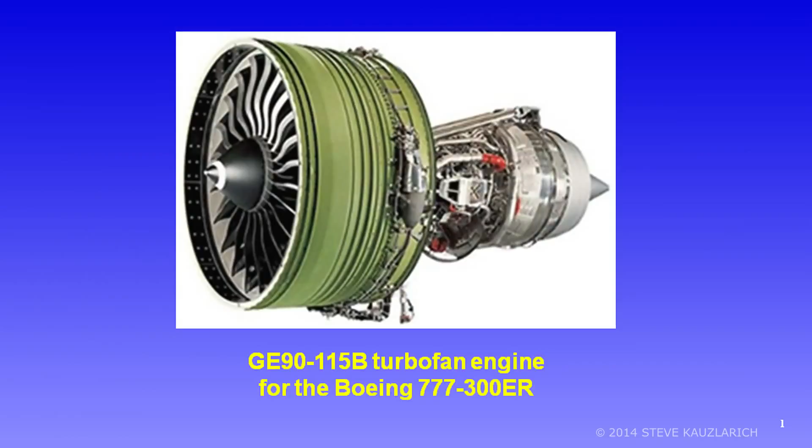So now take a look at that engine I put up there. I have a need for size and power, and this delivers. This is the most powerful aircraft engine ever put into service, built by GE. It has a Guinness World Book record as the most powerful aircraft engine with continuous thrust delivery on the order of 123,000 pounds. That's pretty good. And it's been derated for airline use to about 115,000 pounds, so it'll last longer on the wing.

Let's move on into the next slide. We're looking at the agenda tonight. We see a Westinghouse engine here, which they were not very successful. I'll talk more about Westinghouse's contribution later.

So I'll have some introductory remarks. We'll talk about what is jet propulsion, where did they come from. They came from Europe. What did the US do with this technology? They did a lot of good things with it.

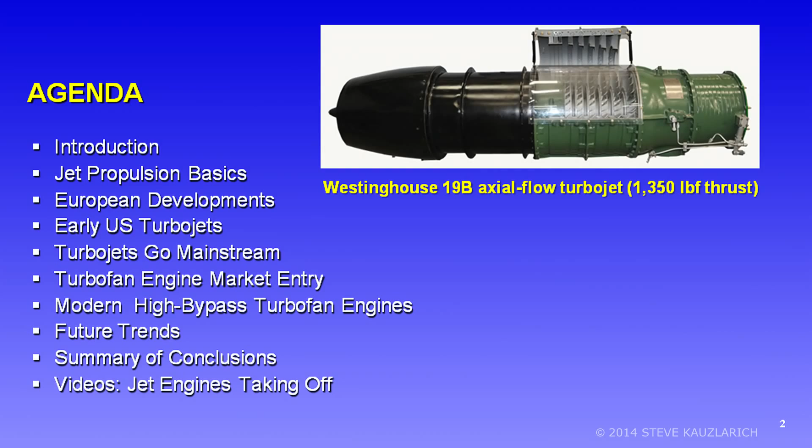We'll look at how the industry transitioned from turbojet to turbofan. In the Air Force inventory, there's almost no turbojets left. There are a few out there, like the T-38 Talon trainer from Northrop, one of the last ones operating with a turbojet. Then we're going to go into the airliner high bypass turbofans used in some military aircraft like the C-5. We'll look at some future trends.

So I'm going to take you from the origin to present and beyond. I'll talk about some of the future concepts being discussed now in jet propulsion, summary conclusions, and then I have two exciting short video clips of famous Air Force bombers taking off, one with water injection assist, the other with rocket assist. In those days, the turbojets were fairly anemic in power and they needed help.

All right, so I'm going to focus tonight on turbojet, turbofan. We'll set aside turboprop for another night. And now when we get to helicopter propulsion, they are turboshaft. They're not considered jet propulsion, with one notable exception.

The engineers at Westland, you got to like these guys. They hot rodded a Westland Lynx and added jet propulsion to it in a very clever way. They took the exhaust output. They have two turboshaft engines. They modified the exhaust, turned it into a convergent nozzle, cut the cross-sectional area by 40%. They picked up 600 pounds of thrust, jet thrust, from the exhaust, and set a world speed record, still not exceeded, for a conventional helicopter. In 1986, they hit 249 miles an hour.

Now notice that it doesn't have to be a gas turbine. Look at all the other variations of jet propulsion here. Some examples of jet propulsion were demonstrated really thousands of years ago, with Chinese experiments using tea kettles, steam kettles with pinwheels turning on top. That's a form of jet propulsion.

We have a ramjet shown down below, no moving parts, and it works. Now with the ramjet, you have to get it up to speed before you light it off, so that's a bit of a problem. They were used on the tips of Hiller helicopter blades, and they did experiments down at Palo Alto on that.

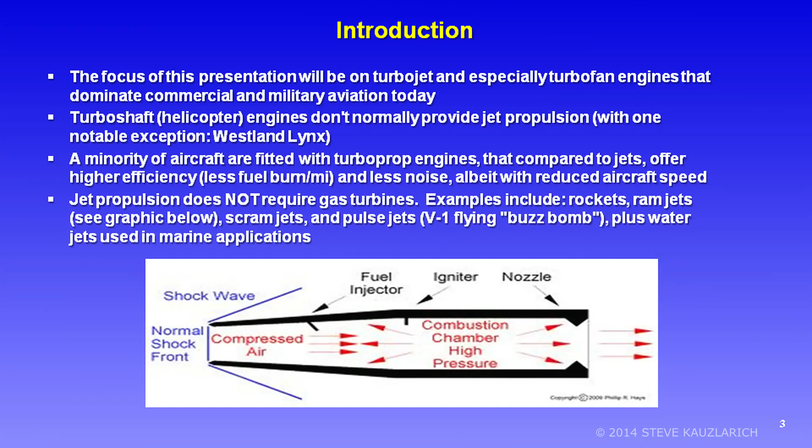What is jet propulsion? It's all about Newton's laws of motion, the second and third law: for every action, an equal and opposite reaction. Jet engines are also known as reaction motors. Every one of them has to produce a backwash force, ejecting gases at high velocity with acceleration and mass. The backwash force is immediately countered by a forward thrust force. It's automatic, you don't have to think about it. Kick stuff out the back, you'll be pushed forward. You're not sucked or pulled forward, it's just an automatic reaction to the backwash force, and it's neat how it works.

The fluid mediums could be all kinds of different gases. Here's a cutaway of a typical turbojet. You can see where the air comes in, is compressed, goes into the combustion chamber, and they light it off. So you're raising the pressure of the air, then raising the heat and combining it with fuel, and burning it. That goes into the hot turbine section where it spins those wheels. The pressure's let down, mechanical work is done, and you get high velocity exhaust out the nozzle. At the turbine inlet stage, they're now getting over 3,000°F, so they have to especially cool and insulate the blades to survive, feeding in bleed air from the compressor section to cool down the hot turbine stage.

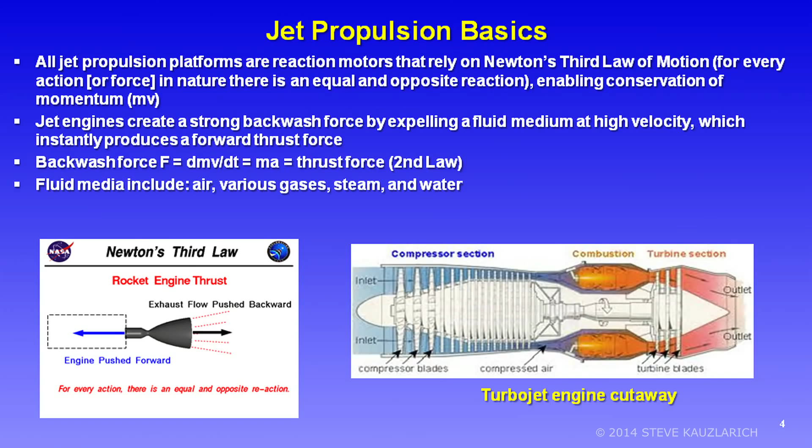This is more of a checklist for engineers. If you're designing this turbo machinery, these are the metrics you've got to meet. And if you're selling these engines to airlines or the military, you better come in pretty good on these attributes if you're going to beat a competitor to get the business. I won't take the time to define all of these metrics for you, but if you're interested later, I could talk to you further about what they mean.

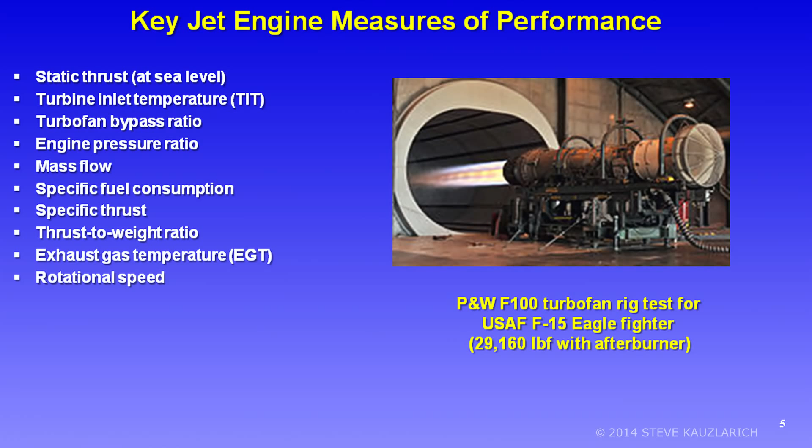I just love this picture of this F-15 Pratt & Whitney F100 engine. See the shock diamonds in the exhaust, right there? That's a sure sign of supersonic gas flow out the back end. Now, this happens to be a low bypass ratio turbofan. All the fighter engines today are low bypass turbofans. We'll get into turbofans more later, how that's different.

So how did piston aero engines lose the business? These are compelling reasons. Look at the performance gains and maintenance benefits of going to jet engines. You can create an airframe that's much faster, can fly a lot higher, and just do an altogether better job.

Now, here's one of my favorites, the J75 Turbojet, and you can mention a couple of the airframes it went into. I happen to have a model of a beloved F-106A Delta Dart Interceptor here that had just one J75. Believe it or not, this set a speed record that still stands today. They set the record in 1959 as the fastest single-engine jet on Earth, hitting Mach 2.31 at 40,000 feet altitude. That was almost 1,600 miles per hour. That's a great job by the Convair engineers in creating speed.

The purpose of this platform is to get up off the ground and intercept Soviet bombers. They had unguided nuclear-tipped Genie missiles to fire at the Soviet bombers. Hey, you just had to be in the general area, you don't need guidance. Just blow a nuke into the formation and you've got them. Never used in anger, just basically test fired once in the Nevada range.

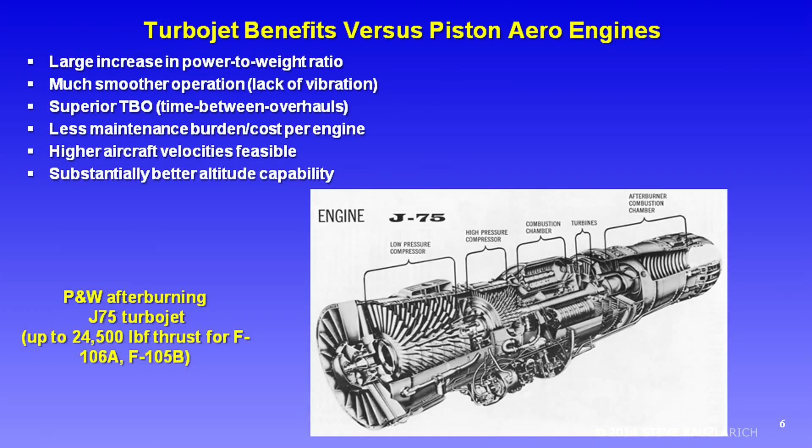Okay, talk about altitude, let me go back. The turbojets easily could exceed 100,000 feet in altitude on a zoom climb. That was awesome. I mean, piston bombers and so forth were good up to about 50,000 feet with lots of turbocharging. So you can more than double that with jet propulsion.

Now, they were a handful in the early days. They had terrible fuel efficiency, the materials were not that good, low thrust - they had to do tricks to get the thrust up, and we'll see examples of that coming up. Oh, they weren't so reliable in the early days either. TBOs are now much better - they were maybe low thousands of hours TBO in the early days, now they stay on the wing for over 20,000 hours. Compare that with aircraft piston engines.

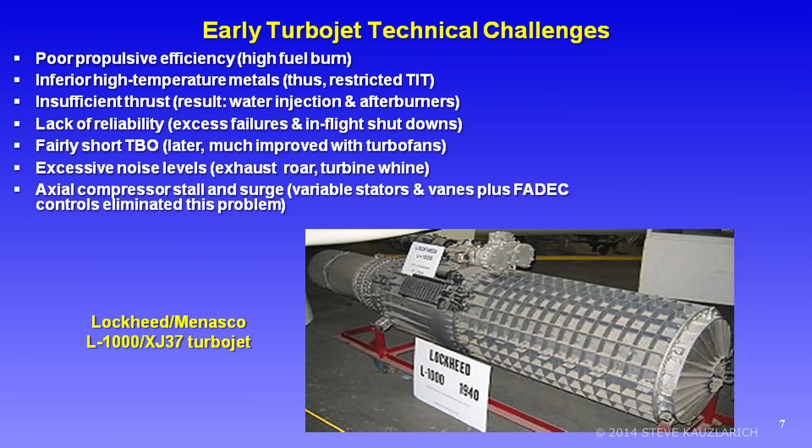Military World War II fighter engines, like the R-2800, had a TBO of about 300 hours because they were very overstressed. An R-2800 in a DC-6 airliner that was nursed and taken care of had a TBO of 2,500 hours. Now we've jumped up to over 20,000 hours with jets.

Talk about noise, this is one of the huge drawbacks of jet propulsion. What is the source of this noise? You've got front end and back end noise. In the back, you have high velocity, hot gas expelled that has violent mixing with cold air behind the aircraft, producing that low frequency rumble. Up front, you've got compressor whine, which is higher pitched and not quite as offensive.

Surge and stall, let's get into that. Do not head toward that surge line. If you get over to the surge line and to the left, the axial compressor loses its ability to compress, it's not compressing anymore. In fact, over there you get reverse flows, and you can have flames coming out of the front of the jet engine instead of the back. So engineers have to keep it in a safe operating point.

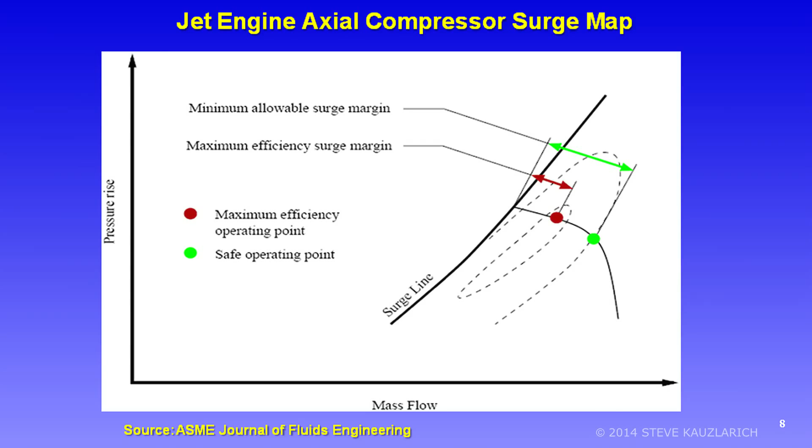A good way to stall an axial compressor is to have too high an angle of attack. Pilots are instructed that if this happens, you've got to reduce power, put the nose down, get the angle of attack down, and get the airspeed up. That will solve the problem.

So that's the story on stall. Stall is easier to handle than surge. Surge can be deadly, and by the way, these jet engines make noises—when they surge, you can get a big old bang coming out of there.

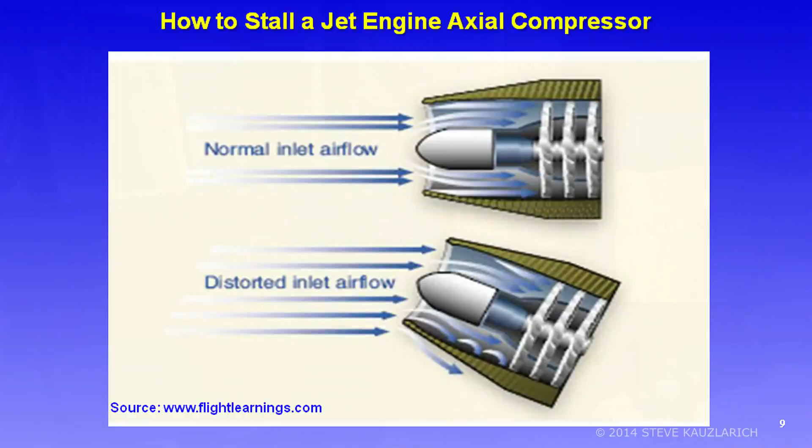Sir Frank Whittle was really ahead of the world in coming up with the concept of jet propulsion for aircraft. He got a patent in 1930 on this concept and had working engines on rig tests in 1937, but sadly he didn't get to fly his engines until 1941-42. The Germans beat him to it. Ohain, working for Heinkel, got his engine working in 1939, running on gasoline. They also tried hydrogen fuel and other fuels.

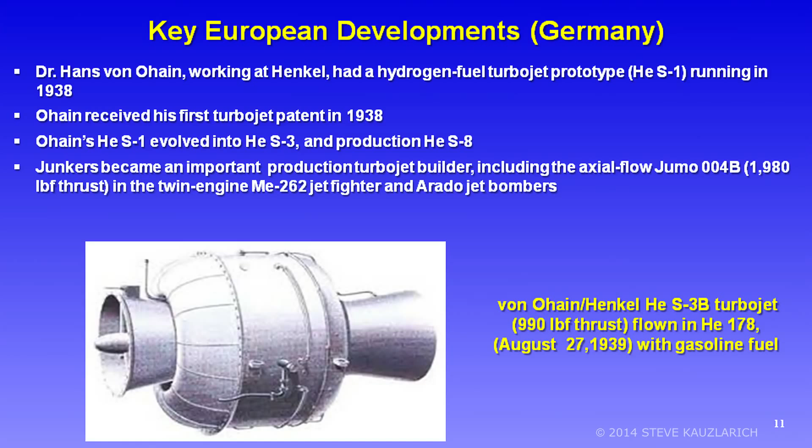Ohain became good friends with Whittle, and they both migrated to the United States and ran into each other often. I think they both went to work for the U.S. Air Force.

Here's Whittle's story. Sadly, his project was pulled from him by the UK government and given to Rover. What a mistake—Rover did not know what to do with this technology, so Rolls-Royce ended up taking it over from Rover to make these production engines. They had production jet fighters in World War II before we got our P-80 going. I have to tip my hat to the English. They also had the most advanced metallurgy in hot turbine sections, using nickel-based superalloys before anybody else on Earth. They had an edge there.

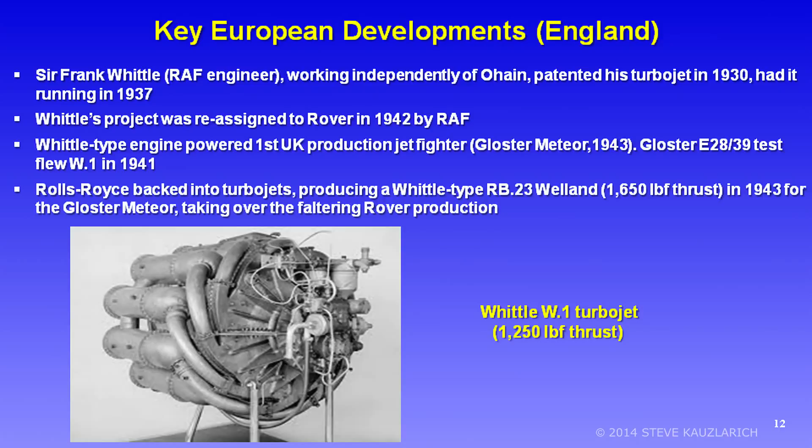Okay, how did we get in this business? General Hap Arnold, commander of the Army Air Force, went over to the UK and secured that license from Churchill and brought it to GE. Why GE? They had a lot of experience with turbo superchargers. In Lynn, Massachusetts, they were a logical proponent to run with this technology, and it didn't take them long to have their first Whittle engine running.

Pratt got in much later, really after World War II. They started with the Nene and then developed their own engines that turned out to be very good. Westinghouse was brought into the business by the U.S. Navy, which was already using them for marine propulsion, steam turbine propulsion. It turned out to be not a very good fit for Westinghouse—they struggled badly in this business and had to drop out.

I used to work for Menasco Manufacturing, so I was real interested in the R&D they were doing on jet engines in the late 40s. Just 3 engines were built.

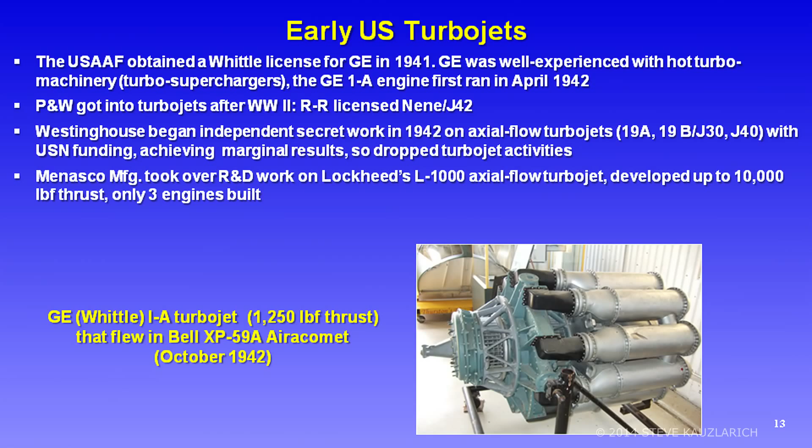Here's a Whittle engine that went into our first jet aircraft, which was totally underpowered and unsuitable for combat, so production was canceled for the Bell jet aircraft. It's amusing—when they transported this Bell around, they put a fake propeller on the front of the aircraft to try to fool people that it was not a jet.

Wow, now they're getting into commercial aviation. This was a big deal when we got into the jet age with airliners. It all started with Pan Am, with 707s, and these early models were equipped with Pratt & Whitney J57 twin-spool turbojet engines.

Great first efforts, but they found out they're still short of power and had to go to tricks like water injection, which gave about a 20% boost as long as you had water in the tank. They brought several hundred gallons typically under certain conditions, high takeoffs. And this had to be clean water—distilled or deionized—so you don't gum up the internals of the engine.

Sometimes they would mix it with methanol for antifreeze. That was a logistics nightmare doing this water injection, but hey, it allowed you to get by with inadequate thrust. And then we'll see a B-47 take off with rocket assist, which is very dramatic.

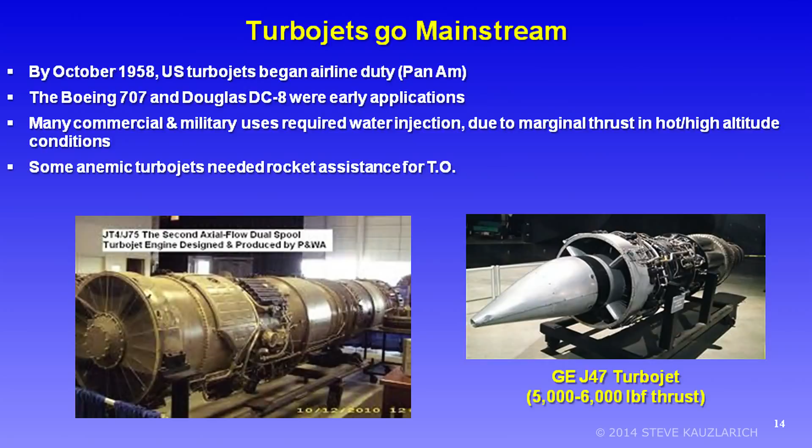There's the J-75 right there, which is the bigger version of the J-57. This GE J-47—there are over 30,000 J-47s built by GE and its licensees. There's 6 of them on each B-47 bomber. They were about 5,200 pounds thrust. It was a single spool design—kind of antique, but it got a lot of sales.

Now, for example, how do they get lower noise? It turns out when they get the fan running, it produces a tube of cool air, a lower velocity cool air, surrounding the high velocity jet exhaust. So it dampens and reduces the noise of the exhaust by having that cool tube of air coming off the fan.

And the fan provides most of the thrust today—up to 85% of the thrust now from a turbofan engine is the fan. The jet exhaust, the jet core, is almost an afterthought. It's just there to drive the fan.

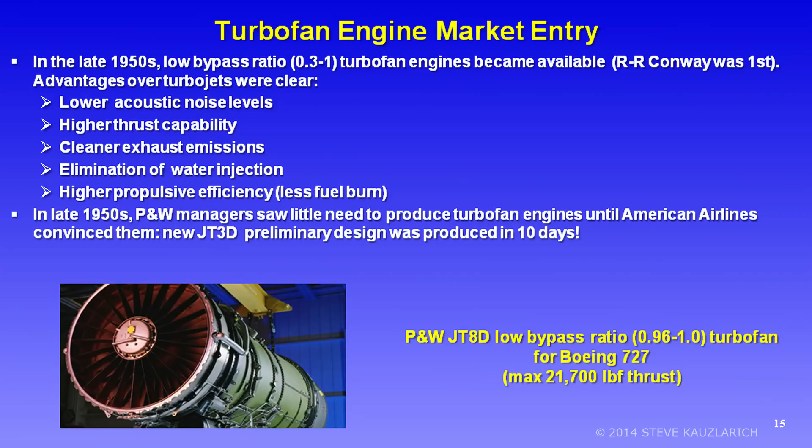Great improvement in specific fuel consumption when they went to turbofans. I think it was hilarious, looking at the technical history of Pratt & Whitney, a book by Jack Connors. They weren't interested in turbofans. How could this be? They didn't see any merit in turbofans—we're building great turbojets, they said.

Until a customer came, American Airlines, and hit them over the head. Said, look, we're ready to place an order with GE. We want an alternative—what can you come up with, in 10 days flat? Can you imagine designing a new jet engine in 10 days? But they did, and off they were. Pratt was very successful in the turbofan business.

Now, there happen to be 4 turbofan engines buried, 2 on each side, buried in these nacelles. There's an S-turn for the air—it has to come in, go down, and hit the titanium fan blade. You have to hide titanium fan blades; they're perfect radar reflectors, unacceptable for stealth aircraft.

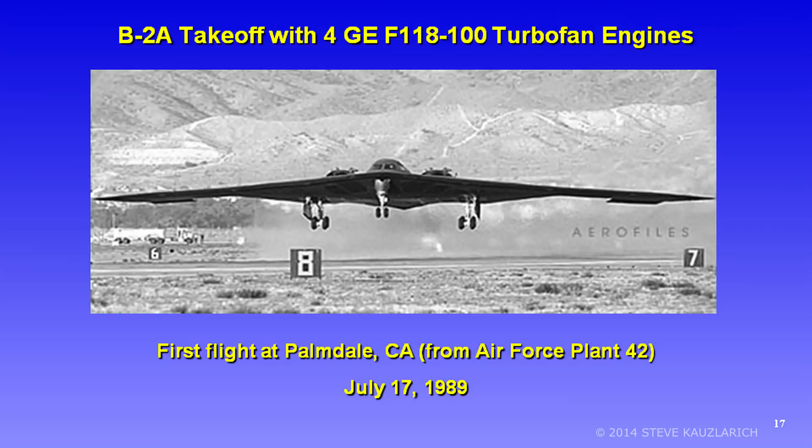So another thing they did with this engine, to reduce the IR heat signature, they mixed that cold bypass air with the exhaust, to cool down the exhaust signature. And the exhaust also exits at the top of the wing to hide it from ground sensors. So they did all kinds of neat stealthy measures, and the engines were part of it.

By the way, they had an engine fire in 2010, and the damage was so extensive inside that wing that it is not expected to fly until later this year. It took years of repairs for an engine fire in a B-2.

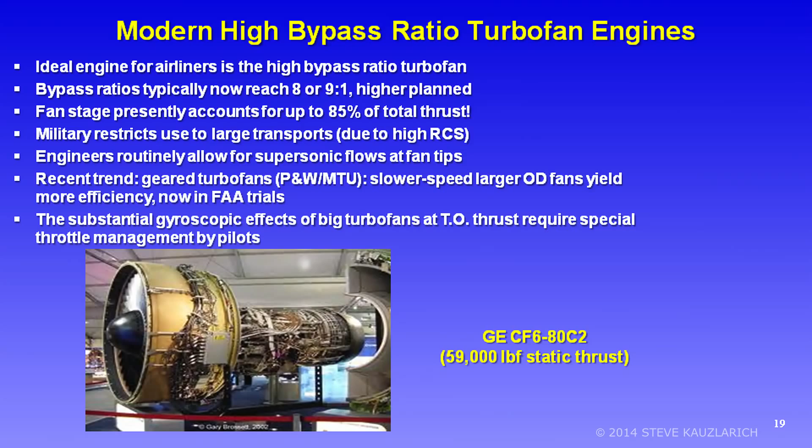But look at the radar cross-section, look at that fan there. The fan on the GE 90 model on my cover slide is almost 11 feet in diameter. What a huge radar reflector that is. So if you want stealth, you're not going to get it with this, but you have to have this. If you have a C-17 or a C-5 aircraft for the Air Force, you need the thrust that fan gives you.

Now this is interesting, I mentioned geared turbofans. We're going to see an example of one in a few slides. The idea is, through a gearbox, you put a bigger fan on and turn it slower, but now the core of the engine can be downsized and turned faster. There's about a 3-to-1 reduction, that is, the fan turns 1/3 the speed of the small core of a geared turbofan.

But look what happens when you take off and the pilot's not careful with a big turbofan engine, especially with titanium blades. The gyroscopic effects are enormous. So pilots are counseled, please roll on the throttles gradually. If you go too fast, the gyroscopic effect can take the aircraft right off the center line into the weeds. So you have to manage that thrust with a big turbofan.

Wow, look at the future of jet engines, make them electric hybrids. Awesome. There's all kinds of studies going on with this right now. They got federal funding, Georgia Tech, to try this concept for a 50-seat regional passenger jet.

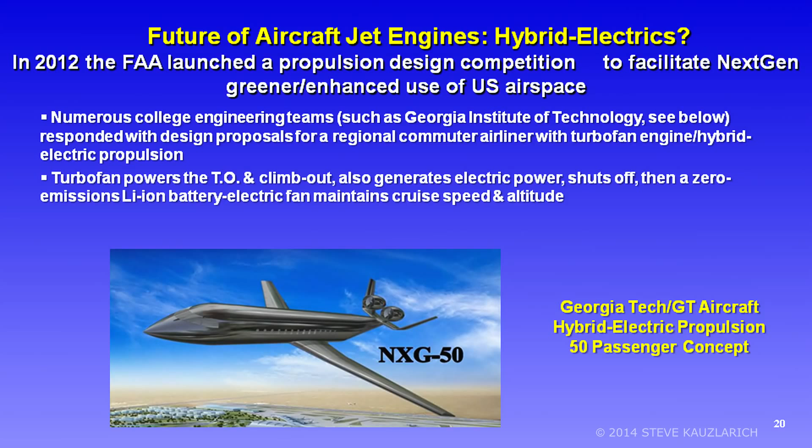The idea is, take off and climb out, you'd be generating power and storing it on board with lithium-ion or some chemistry. Turn it off at altitude and just run on the fan electrically. You have to have motors to run the fan, thousands of horsepower. Just cruise and cruise with zero emissions across your entire flight path until it's time to descend. And you fire up your engines again, and those engines bring you in for landing, all the while recharging your batteries. So that's the concept.

It hasn't been demonstrated yet, but these are the kinds of advanced studies going on right now in the propulsion world. Just as we've seen hybrid electrics make a big splash in the automotive world, cars and trucks, it's now coming to aero propulsion.

Now look at this high-tech stuff that's in development or already introduced, with special materials, super high bypass ratios. I mentioned 12, how about 15? There's a lot of tricks in the trade that people are working on.

Now Rolls-Royce, it's interesting, they publicly disparaged Pratt's work with geared turbofans, and then they said, well, you know what, this makes sense for the biggest turbofan. Our biggest Trents going forward are going to get that new architecture. There's some compelling advantages. If you can make that gearbox ultra reliable, you cannot have gearbox failures like you see on helicopters. In this application, you're carrying passengers. So they're going to have special attention to the gearbox.

Big fans, how big do you want? Here, they're going to be so big you can't hang them under a wing. Are you going to put them above the wing now? I don't know. Or have extremely tall landing gear to bring the airframe up for fan clearance.

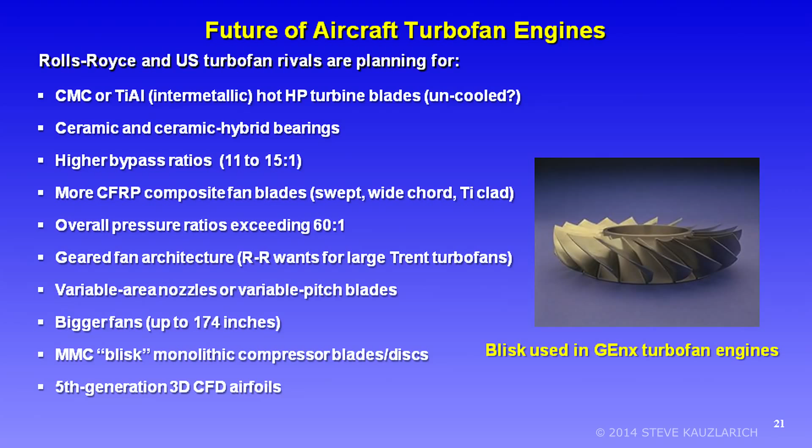So that's a glimpse of the future in jet propulsion. To summarize, we saw the work in Germany and then England, which came to the US. Here are the key players in the US. Today it's really just GE and Pratt who run this business, and the others have kind of dropped out.

Wright had no idea what they were doing with turbojets. The J65 was a total failure. Lycoming.

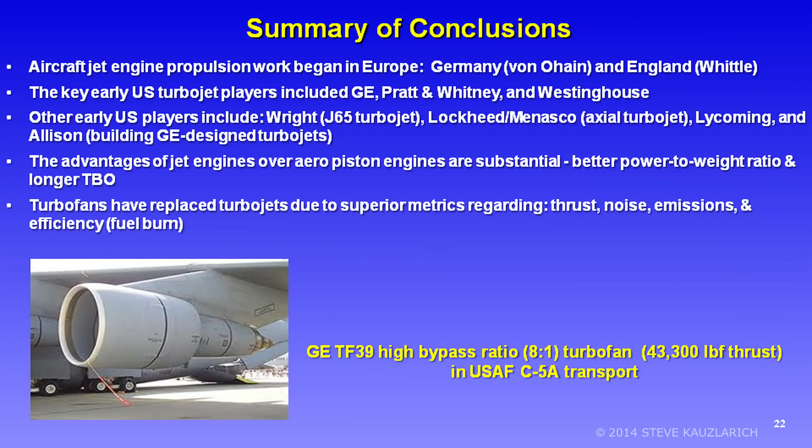Allison was successful at being a second source. Allison built most of the GE aircraft engines. In the 40s and 50s, that was the government's doing - they said, let's hand this over to this shop in Indianapolis, at Allison. And they built a hell of a lot of them to GE spec, and let GE go on and do new engine programs that were more developmental.

So we saw the advantages of jet engines over pistons. There are a lot of advantages there. I mentioned before the low vibration advantage of jet engines, but they are susceptible to vibration problems.

In fact, the one and only time I faced an in-flight shutdown in a commercial airliner was due to vibration over the North Pacific. This was a Pan Am 747-100 or 200, Pratt & Whitney JT9D engines, Narita, Japan to SFO. The engine went red line on vibration, one of the four, over the North Pacific, and they had to shut it off and let it windmill. The drag is so high from a windmilling turbofan engine, they would never make it to SFO, so they had to divert to Honolulu, Hawaii, and change planes and engines.

So that is pretty rare today. It's extremely rare for an in-flight engine shutdown with modern turbofan engines. Some of you remember the piston airliner days.

Now that was really exciting and dramatic. I'll never forget a takeoff in a DC-6 American Airlines from Hartford, Connecticut in the 50s. I had a window seat, and these were all 4R2800 Pratt & Whitney engines. The one next to me at the window, the number 2 engine, caught fire on takeoff - black smoke, like an oil fire or something. They had to reject the takeoff and we had to get on another plane.

Now here we are - here's that geared turbofan, now in development, going through FAA trials. It's not yet released for production, but they're building engines - Pratt's building engines here with their MTU partner - in the range of 15,000 to 33,000 pounds thrust, bypass ratios around 9 or 12 to 1, and fans up to 81-inch diameter. So that's coming on the horizon.

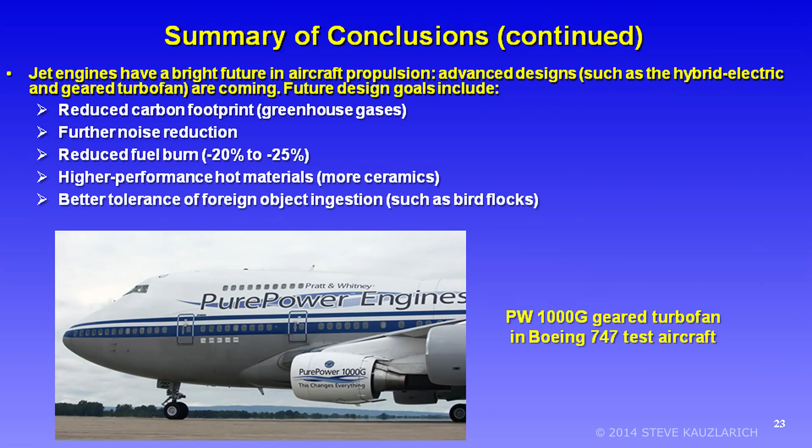And so with that, I think we're going to go right to the dessert course - the jet engine takeoffs. First, let's hide this document, escape, and we'll close it, and go right to the video.

This was from the movie Strategic Air Command. You can get this at Amazon.com. I think it's a classic. They also show a B-36 takeoff, but the B-47 takeoff is very dramatic. It was filmed at MacDill Air Force Base in Florida, which was an operational base in the 1950s. We're going to see the great Academy Award-winning actor Jimmy Stewart at the controls of the B-47.

Now you'll see him call out RATO on. The Air Force liked to use the term RATO, rocket-assisted takeoff. The US Navy preferred JATO, jet-assisted takeoff. Actually, the Navy pioneered this technology with flying boats in World War II, and they typically used 1,000-pound thrust Aerojet rocket bottles, solid-fuel rockets that are expendable. So let's watch.

This is MacDill, Florida, Tampa, Florida. Coming close.

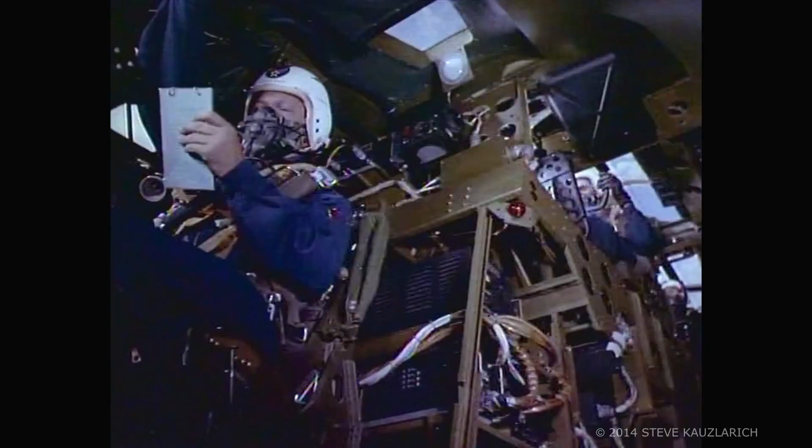Okay, Dutch. How about you, Rocky? Roger, MacDill Tower, that's 5024. We're ready to go. 5024, you're clear for takeoff. Roger, 5024. Rolling. RATO.

Now, that was the B-47B model. The next variant was the E model, like this one, had much higher production. But in the B model, you notice they had 9 rocket bottles per side. I talked to the air crews, B-47, and they had to demonstrate one of these takeoffs every year as part of your qualification to fly the B-47, to show you can do it. But it was not routine to use the rockets.